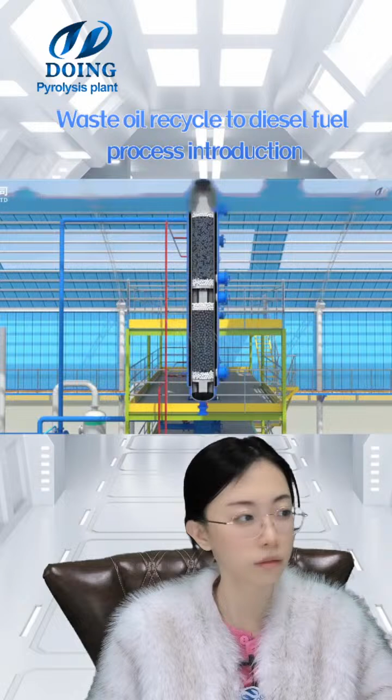All the equipment can be customized. We have different types of equipment. Later we will show you the parameters of this distillation equipment. That is to purify the waste oil, like the waste engine oil, lubricating oil, or the tire oil, plastic oil. After the pyrolysis, we can get the diesel. We always call it a distillation plant, or the pyrolysis oil distillation plant, or refinery plant.

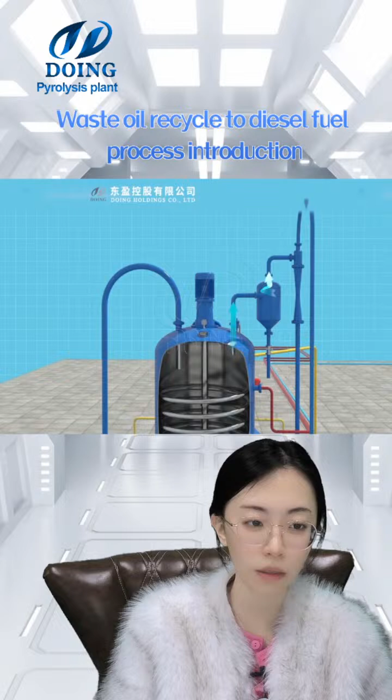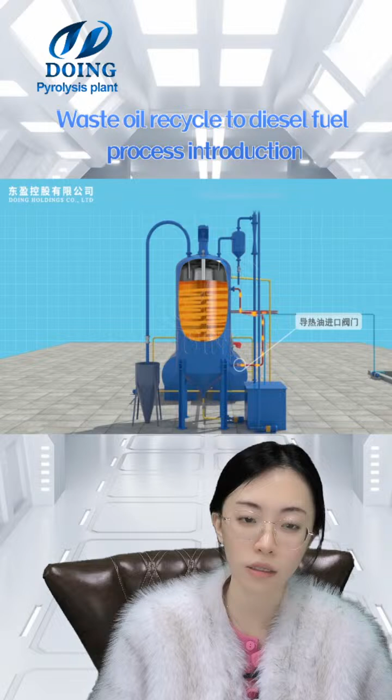This 3D video is about the distillation equipment that can process the oil, the waste engine oil, lubricating oil, or the pyrolysis oil. It includes the distillation and the cooler section. You can look at this 3D video first. We will introduce the details of the device and section later.

And now we have our own factory. So if you have the requirement to visit, you can tell our sales manager. Our factory is in Henan province in China, next to our company. The company is in Zhengzhou City, Henan province.

We have different devices, like this distillation equipment, and also the waste tire, waste plastic pyrolysis equipment, and the PCB board, solar panel, lithium battery crushing and separation device, and the biomass carbonization furnace. And today we introduce the distillation plant. There are different devices that can purify the pyrolysis oil or waste engine oil to diesel. It includes the stove and the cooler system.

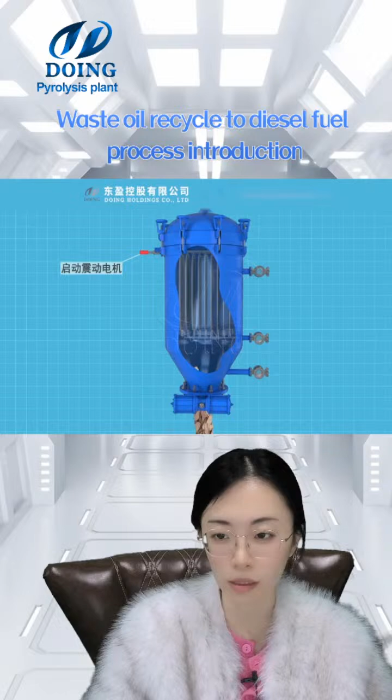We have different capacities, like 1 ton, 5 ton, 7 ton, 15 ton, to reach your requirements. And if you have different configurations, you need to contact our sales manager and engineer, and we can give you the best plan for you. All the equipment can be customized.

And this is the purification system. All the devices are environmentally friendly, there is no pollution during production. In the purification system, we have different plans because the policy is different in different regions. So there are different ways to purify the harmful gas during our production.

Okay, let's start from here. This is the new distillation plant. We also have another technique. And this is the conduction oil. It will reach the whole system for the double heating system. The high-level tank, because this is the highest point, has the highest potential energy to let the conduction oil fill the whole system. This is the furnace and the cooler.

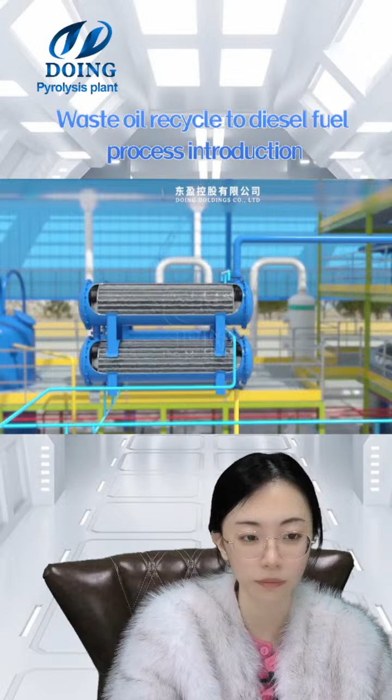Now the temperature is nearly 380. Just in order to protect the catalyst, we designed it so the previous section of the oil doesn't go to the catalytic tank. It will be controlled by this valve, and then it will go directly into the condensation system and into the first oil tank, because the catalyst is a kind of expensive consumable during our production.

This tank is equipped with a glass tube so you can observe the color of the oil. If the color of the oil is not ideal, it will go into the catalytic tower. And the uncondensable gas will return to the furnace for heating, and then the tail gas burner is used to heat the reactor.

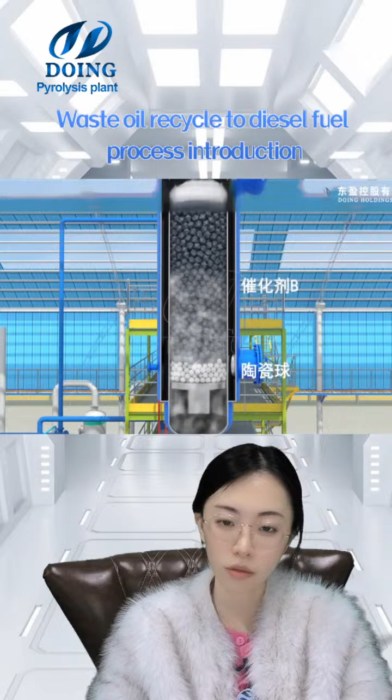And the next oil will go through the catalytic tower. These are two kinds of catalyst. This is the ceramic ball that supports the catalyst. Then it will go through the tank and into this second oil storage tank. Same as before, the gas goes into the tail gas burner. And now we have finished our distillation system.

But if you want lighter diesel oil, we can equip it with the white clay decoloring tank. First we need to vacuum the clay decoloring tank, so that the oil will subsequently be pumped inside. This is a negative pressure system to pump the oil.

And the condensed oil is inside. Here is the white clay. Put it into the oil, and it will mix. We need nearly 5% white clay. In this tank, a motor mixing pump mixes it for nearly half an hour. Then the oil will be pumped into this blade filter to filter out the white clay.

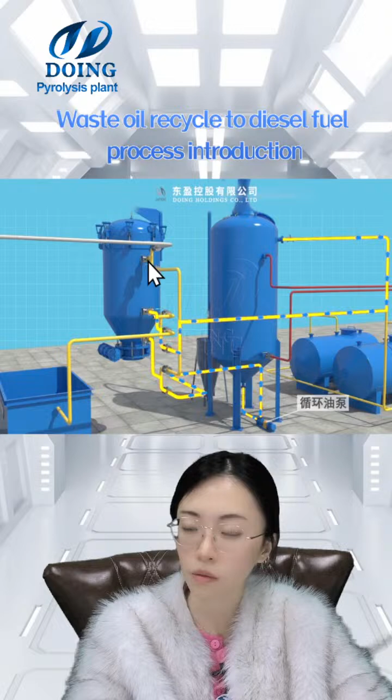The oil with the white clay will circulate continuously between the blade filter and the white clay decoloring tank. Here is the glass tube where you can see the color, whether it reaches your requirements. Then the oil will go into this, called the bag filter. We have two bag filters: one in use, and one standby.

This is the last filter used to clean the clay, which makes the quality of the refined oil better. The filter bag is inside. Then the oil after refining will go into the finished product oil tank.

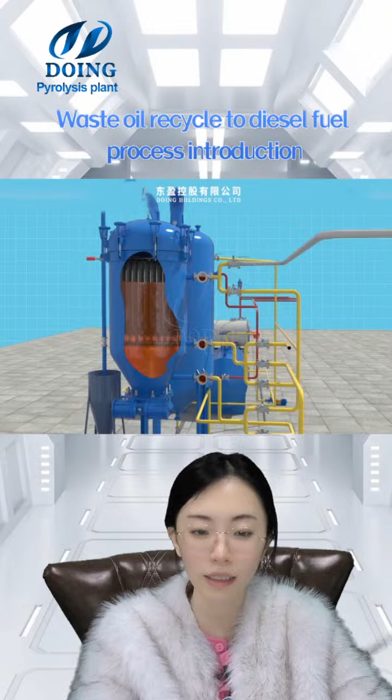This is the air compressor, which blows air back into the blade filter to dry the white clay inside the filter and make it easier to fall off. Then, you see, we use the vibration motor to shake out the white clay. That is to blow air inside and dry the white clay on the blades. Here is the vibration motor to clean the clay.

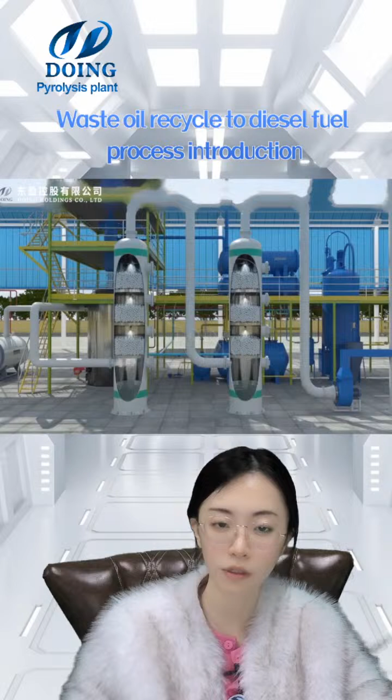And here is the flue gas treatment and purification system. We have the spray tower, and also desulfurization towers to remove the sulfur dioxide, and also the bag dust collector and cyclone dust collector to purify it. They have different techniques and devices. So our equipment is pollution-free and can reach different standards in different regions.

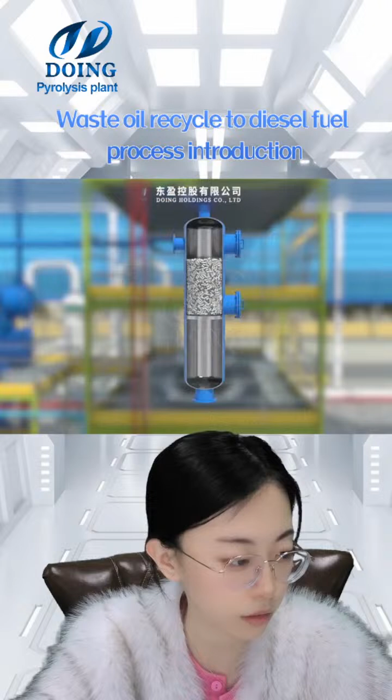And let's see the catalog of our plant. This 3D video shows our distillation equipment; if you are new here, you can look at this, and later we will introduce the detailed technique again. Then let's look at our catalog to see the parameters of the distillation equipment. Yes, this is the brief introduction.

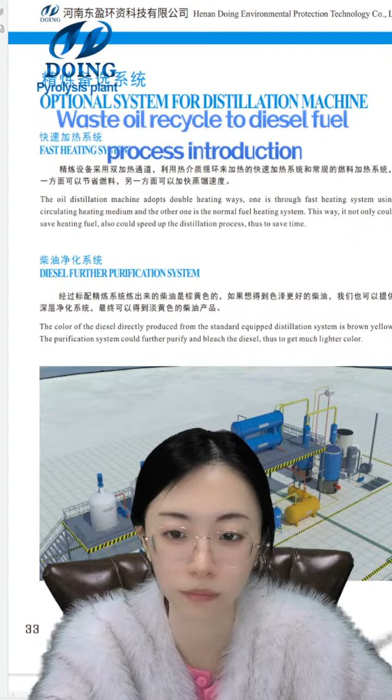Can you see the word clearly? Here it is. The oil distillation machine adopts double heating ways. One is through a fast heating system using circulated heating medium, and another way is the normal fuel heating system. The heating medium is the heating oil, which will go through the whole system of the plant. In this way, it will not only save heating fuel, but also speed up the working process.

And the final products we get: the color of the diesel directly produced from the standard equipped distillation system is brown yellow. Well, if you want to get high quality or more pure diesel, you can use this white clay decoloring system and get a lighter color.

And this is the PLC system to save workers and to improve your working efficiency. All the PLC system is built in our factory, so it is 100% the same as your customized working line.

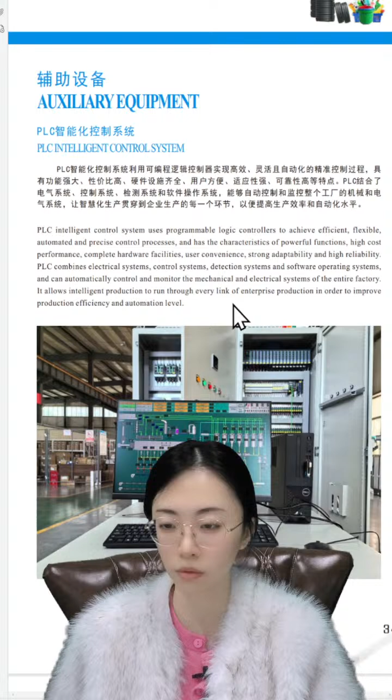The PLC intelligent control uses this high technology. We have our own engineers, so if you need to customize or to get higher working efficiency, then you can contact our sales manager and see if it's available to get this processing line.

We don't have the parameters of the distillation plant in this catalog. Here are the projects. Customers visit our factory, our company. This is the factory that has the reactor, the pyrolysis plant reactor and the distillation reactor. A customer in England. Here it is in our factory. This is one of the batch type pyrolysis plant prototypes in the factory. If you come here, the first equipment you see is this, the pyrolysis plant and the condensation system. Here is the reactor for 15 tons per day.

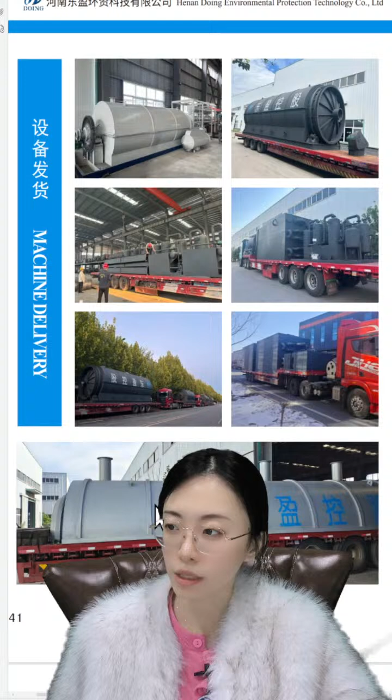Some delivery pictures. Now we have our customers in more than 120 countries. So it's very convenient for you to visit our project cases, or to see the market, know the market of your region. Here is the pyrolysis plant. And this is much bigger than that one because this is for 50 tons per day, the continuous one. We have 3 types of pyrolysis plant: the batch type, semi-continuous and fully continuous.

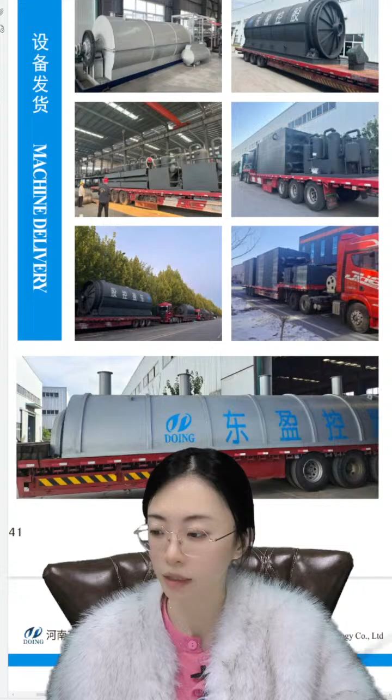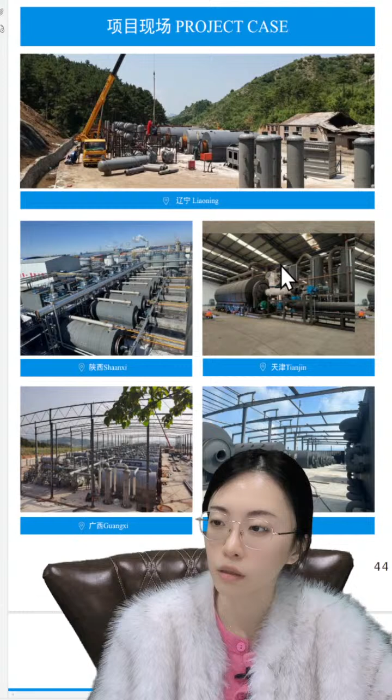And here are the project cases in China. Liaoning province, which has 8 batch type pyrolysis plants, and this is Shaanxi, to process coal tar sludge. Tianjin, a customer processing mixed hazardous waste. And this is the distillation equipment in Anhui province.

This customer is for the semi-continuous pyrolysis plant. Because we have 3 types: the batch type, fully continuous and the semi-continuous one. The semi-continuous is to process carbon black and plastic particles with high efficiency, and doesn't need to discharge the carbon black at normal temperature. This is the fully continuous pyrolysis plant in Liaoning province.

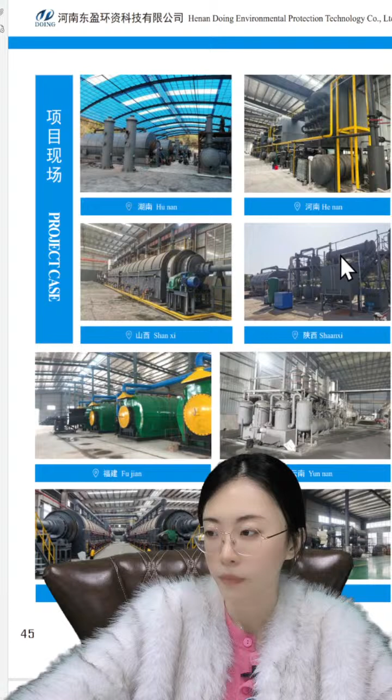And now in China, in almost each province, we have our project case. So if you want to see the project cases in China or to see our factory, it's more convenient to come, and transportation is very convenient. This is a customer abroad, America, with the fully continuous pyrolysis plant. And this is a batch type, with a unit of the condensation system. And the distillation equipment in South Africa.

We have our subsidiary companies in Africa and Nigeria because there are many customers, whether customers of the pyrolysis plant or the cassava, the oil. And here there is also a fully continuous pyrolysis plant in Kazakhstan to process waste tires, 50 tons per day. Mexico, Brazil. Another Mexico project case, which has 12 batch type pyrolysis plants. Vietnam, Brazil, Philippines.

Here are some patent certificates of this equipment. We have several patents, like the safety device, the purification device, the vacuum device, the auto removal system. It's all our patent. We have our own engineering team, and all the equipment can be customized. Here are the patent certificates.

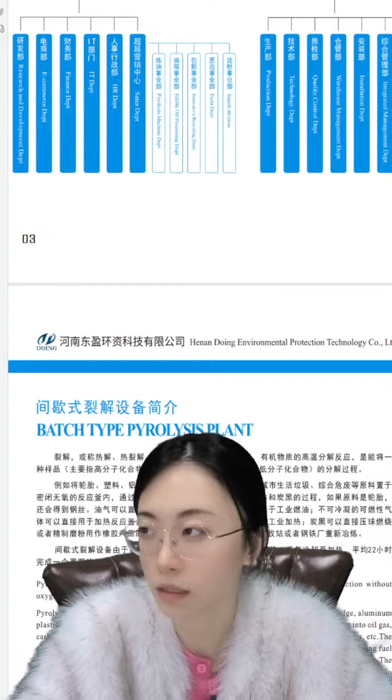Here is the batch type pyrolysis plant. We have three kinds of pyrolysis equipment: the batch type, semi-continuous, and fully continuous, which have different working efficiency. The batch type is one batch per day and can process tire, waste plastic, oil sludge, coal tar sludge, aluminium plastic, or other uncommon materials, and can get the fuel oil from them. The fuel oil can be used in brick factories for heating, cement factories, glass factories.

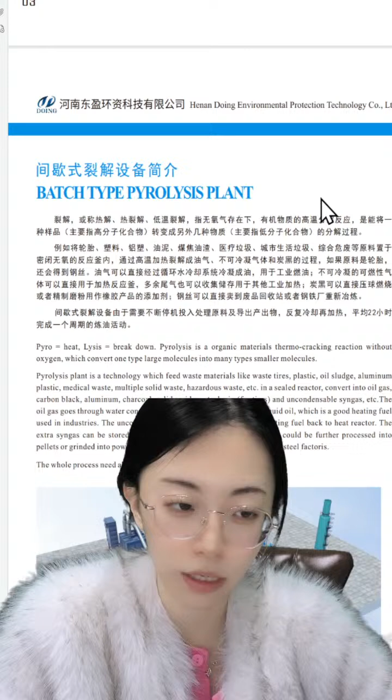This is a batch type pyrolysis plant.

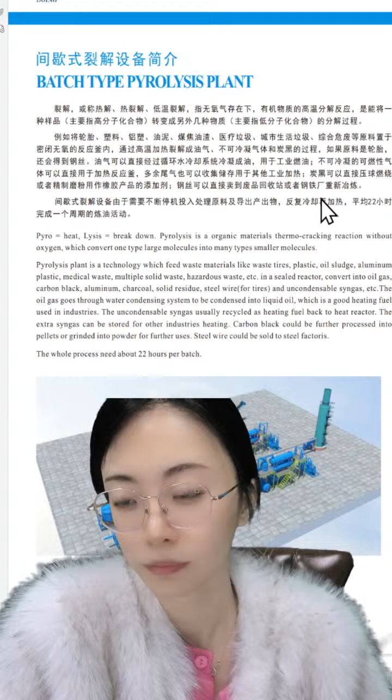Let's see the 3D video of them. This is a 3D layout: the feeding system, pyrolysis system, condensation system, the deep processing of the carbon black, and this is the auto removal system.

This is the profit analysis. For reference, we can see the consumption and the income every day, in each step. But because the price is different in different regions and the market changes, it's just for reference for each section.

We don't have water consumption, but we have the power, the labor, and the raw materials to consume. And this is the pyrolysis plant, for reference, not the same as the distillation equipment. Here the example is a 10 ton per day batch type pyrolysis plant.

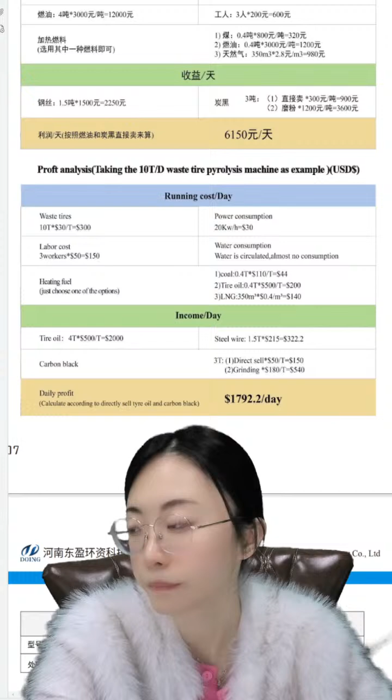In different regions the tire price is different, the power consumption is not the same, and the price of the tire oil also changes. In China, in these years, it's nearly 3,000 or 4,000 each ton, but a few years ago it was more than 5,000. So it has changed a lot, and the market has changed.

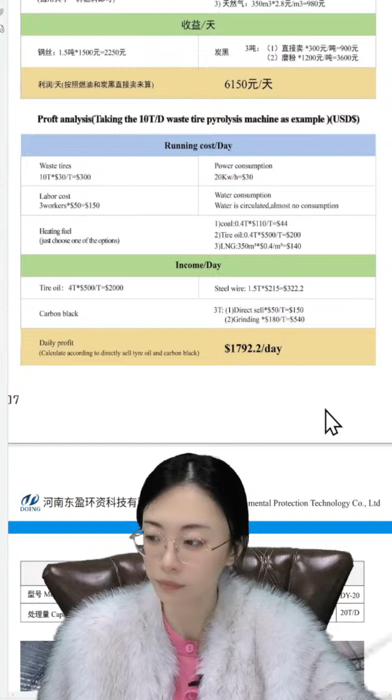This is the parameter of the batch type pyrolysis plant. The smallest one we have is 100 kilograms per day. The largest one is 20 tons per day. It's a little bit smaller than the continuous one. The continuous has the highest working capacity, 50 tons per day.

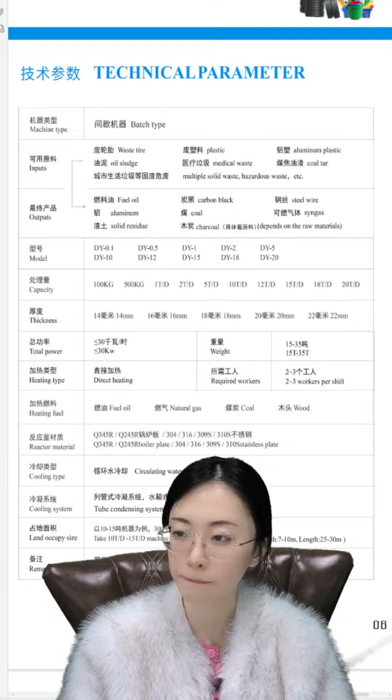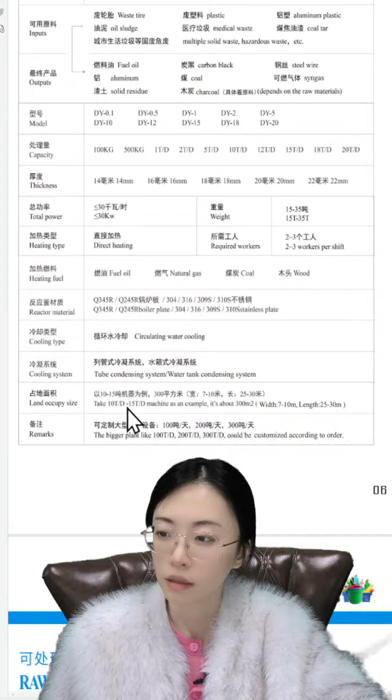Here you can see the weight, the power, the labor required, and the land occupied; the size for 10 ton is nearly 200 to 300 square meters.

You may ask, what is the raw material and what products can we get after pyrolysis? The most common materials we use are waste tire and plastic. The oil yield for waste tire is nearly 40 to 45%. We also have 35% carbon black, 15% steel wire, and the syngas.

About plastic and other solid waste: if you get pure plastic, the oil yield can reach 90% to 95%. But for garbage, daily waste, or construction waste, the oil yield is different. So we need to experiment.

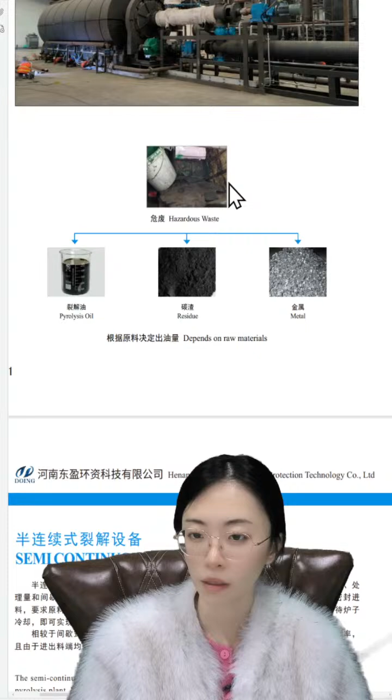Next is the semi-continuous pyrolysis plant. This is different from the batch type. It can discharge carbon black at a high temperature without needing to cool down the reactor, so it has a higher working efficiency.

It's designed by combining the processes of continuous and batch type pyrolysis plants. The equipment, dimensions, and processing capacity are basically the same as the batch type. The difference lies in the improvement of the feeding and discharging ways.

The feeding way is changed from opening the furnace door to a screw conveyor, a sealed feeding way, which requires the raw material to be pre-treated. So if your material is waste tire, we need to process it into rubber powder. If it's plastic, we need to turn it into plastic particles.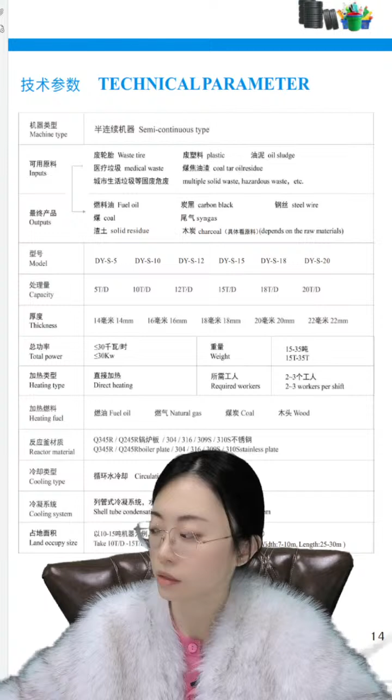Here is the parameter of the semi-continuous. Almost the same: the model is the same and the land occupied is the same, just the working efficiency differs. The batch type is one batch per day, and the semi-continuous one is 3 batches in 2 days.

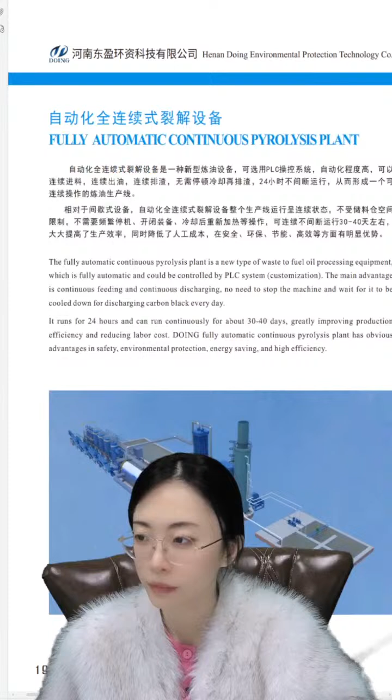The fully continuous is a new type of waste-to-fuel processing equipment, which is fully automatic and could be controlled by a PLC system. The main advantage is continuous feeding and continuous discharging. No need to stop the machine and wait for it to cool down for discharging carbon black every day. It runs for 24 hours and can run continuously for about 30 to 40 days, greatly improving production efficiency and reducing labor cost.

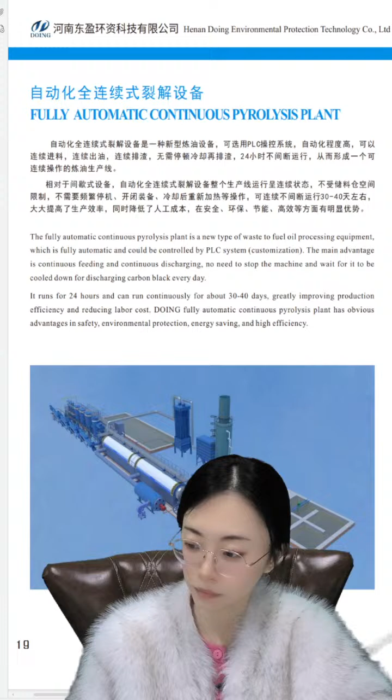This is kind of different from the semi and the batch type. First is the model or the capacity. The biggest one is 50 ton, and also we have 15 ton, 20 ton, 30 ton, 40 ton. Another difference is the heating type. The batch type and the semi-continuous use direct heating, but this is indirect heating. And the requirement of workers is 1 to 2 workers.

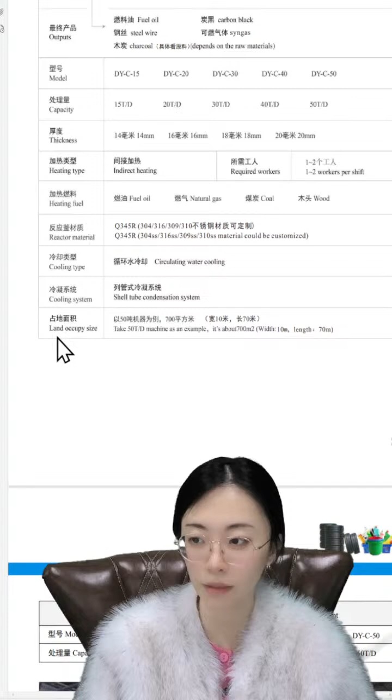This is the land occupied size. Actually, the fully continuous saves much more land, because for the same capacity, for example 50 ton, we only need 700 square meters. But for the batch type, we need almost 1080. Here are the reactor materials, same as the semi-continuous one.

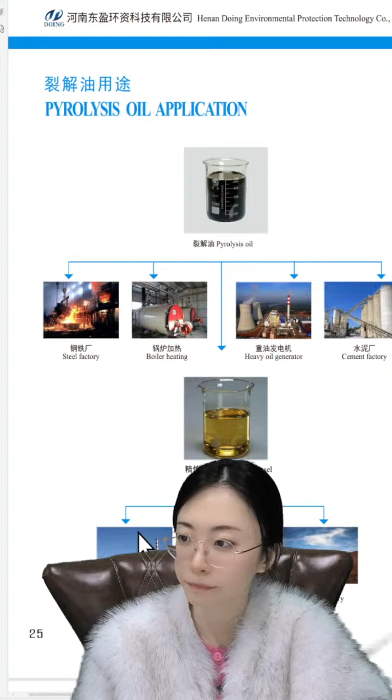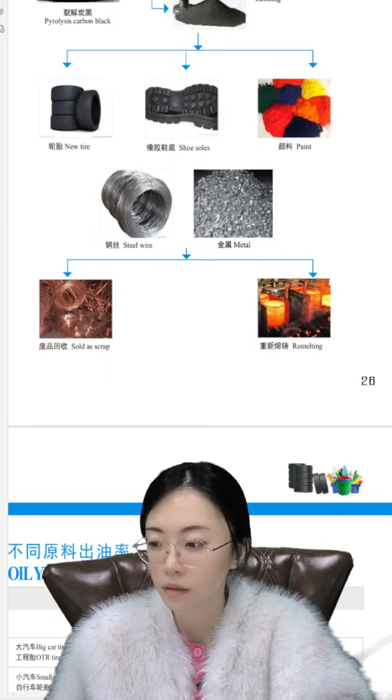An application of the oil. If you get the pyrolysis oil, you can use it as heating fuel in the steel factory, boiler heating, heavy oil generator, cement factory, or we can refine it into diesel, used in diesel generators, as diesel fuel for heating, or in heavy machinery. And the carbon black can be used for burning or refined.

And this is the different oil yield. Most of our customers are interested in this. Like tire, 45 to 55, 52, and most customers will choose big car tires or OTR tires. For general plastic, if you get pure PP, PE, PS, the oil yield is 90 to 95, and others like pure ABS is 45. Household garbage is 30 to 50, and aluminium plastic nearly 40%. And you need to pay attention that PET and PVC, these two materials, are not suitable for pyrolysis.

Okay, here is the distillation equipment. It's today's topic. The distillation machine is specially designed for refining black oil, heavy tire oil, plastic pyrolysis oil, and various industrial waste oils into light diesel. This whole refining process includes distillation, cooling, decoloring, and deodoring systems. The final diesel products could be used as alternative fuel in diesel burners, generators, heavy machinery, and agricultural machinery. Generally, the diesel yield is about 80 to 85%.

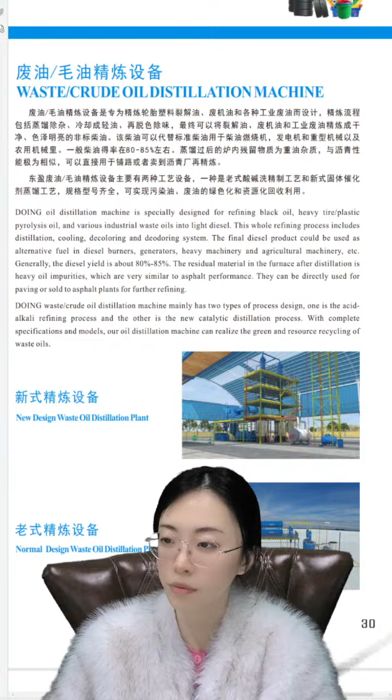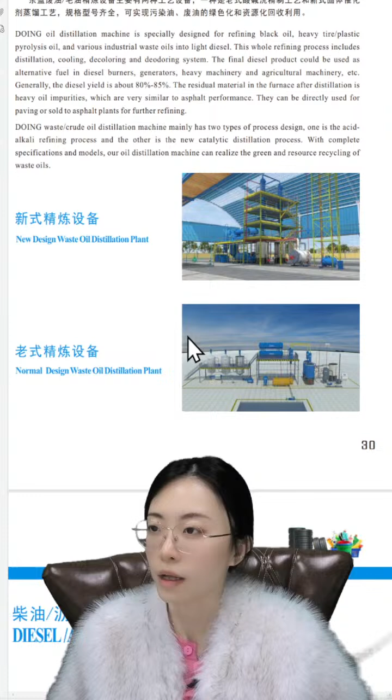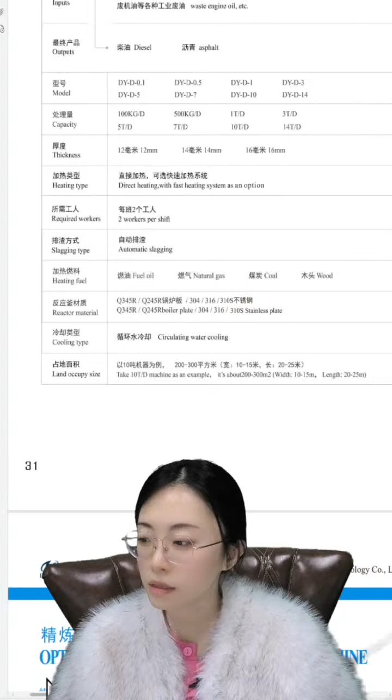Here are the parameters of the distillation plant. The models we have: 100 kilogram, 500 kilogram or 1 ton, 3 ton, 5 ton, 7 ton, 10 ton, and 14 ton. The heating way is direct heating, with a fast heating system as an option, and it requires 2 workers in the whole production line, and it occupies 200 to 300 square meters for 10 ton per day.

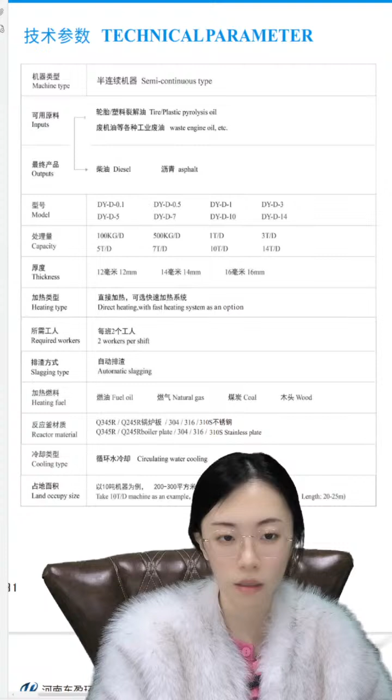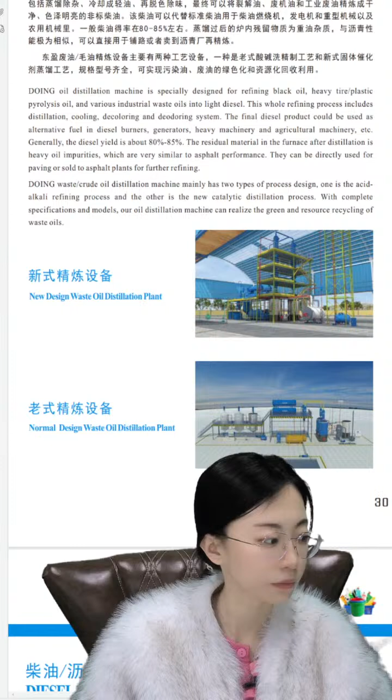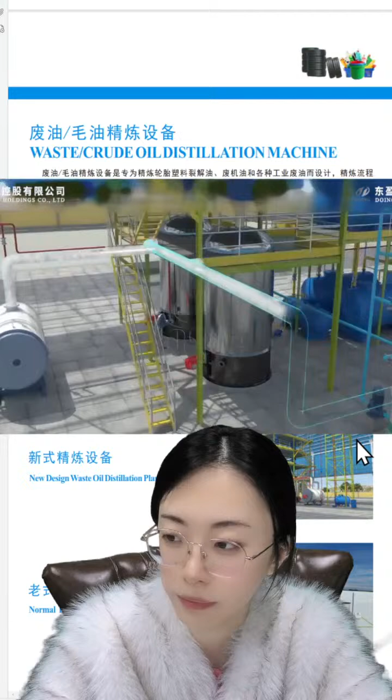Here is the 3D video. You can see this first, the distillation plant. It is to purify the waste oil into non-standard diesel, the lighter diesel, and it can be used in generators, agricultural machines, ferries or other places. The whole production line includes distillation, decoloring, and the purification system. Here is a purification system to purify the gas.

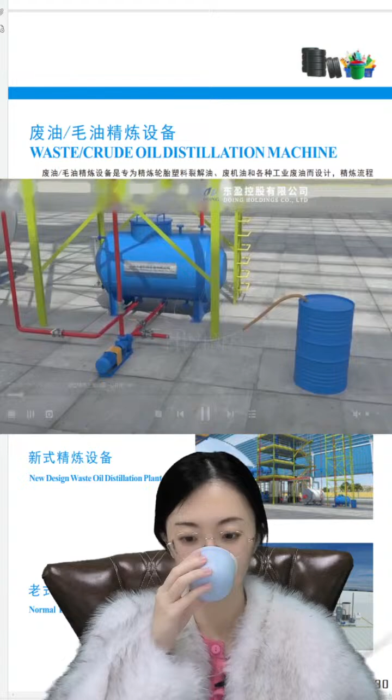First, this is the conduction oil. To pump the oil in the whole system, conduction oil.

Here is the furnace to heat the conduction oil, with the 400,000 calorie burner. And this is the circulating cooling water system of the conduction oil, and also this is the condensation system.

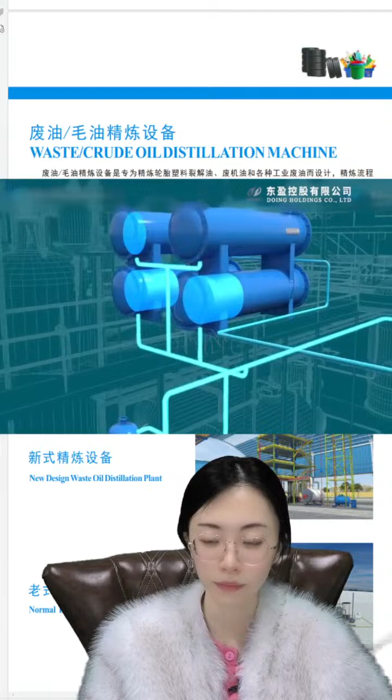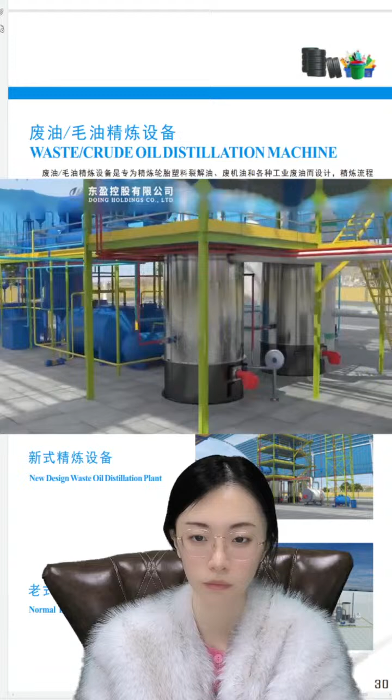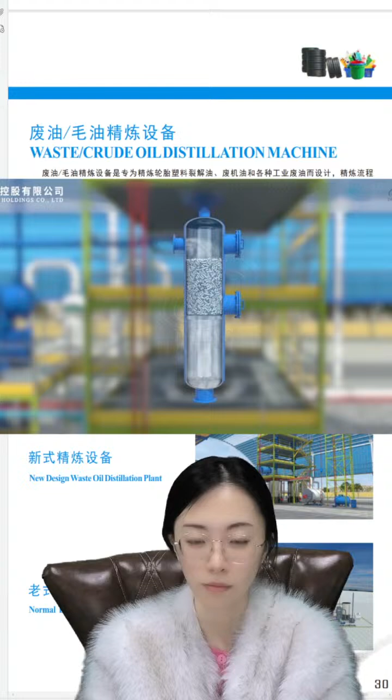This is the furnace. The conduction oil will go in the bottom and goes out from the top to fully heat exchange. First, we get this kind of water, and kind of emulsifiable concentrate. They will go through the buffer tank and go into the condensation system to liquidize them into oil.

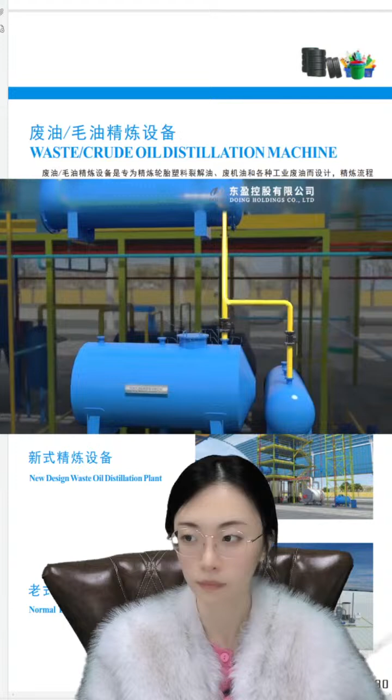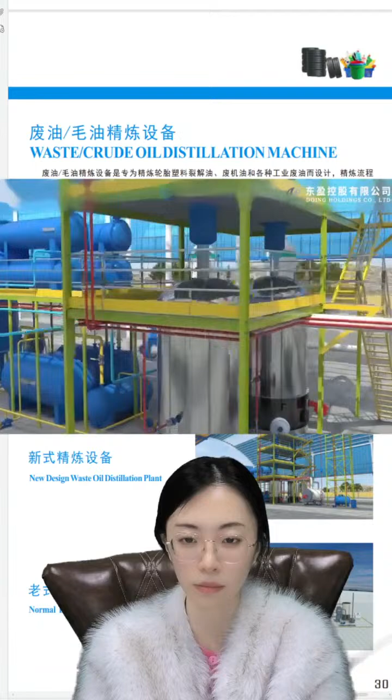This is the first tank. Then, when the temperature gradually rises, the oil gas will begin to produce, nearly 380 degrees. The same as the gas, they won't go into the catalytic tower, they will just directly go to the buffer tank and the condensation tank, and then will be collected into the first oil tank.

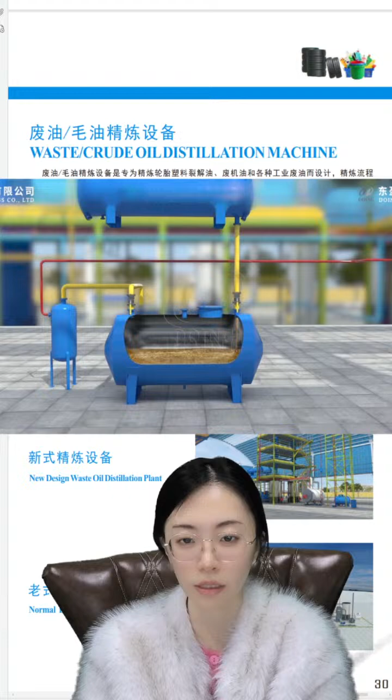The oil tank is equipped with a glass tube to observe the color of the oil. If the color is not ideal, they will go into the catalytic tower. The uncondensable gas will return to the furnace for heating to save our extra heating energy.

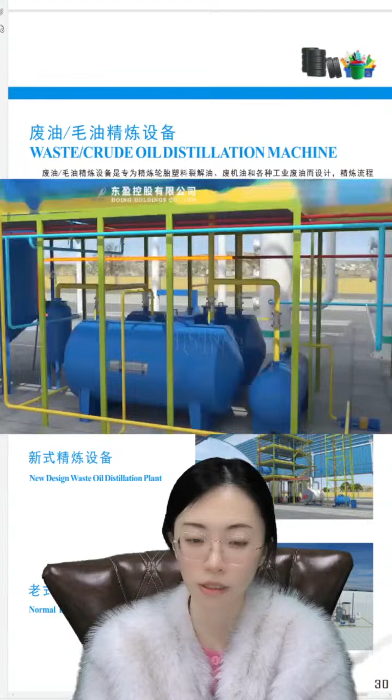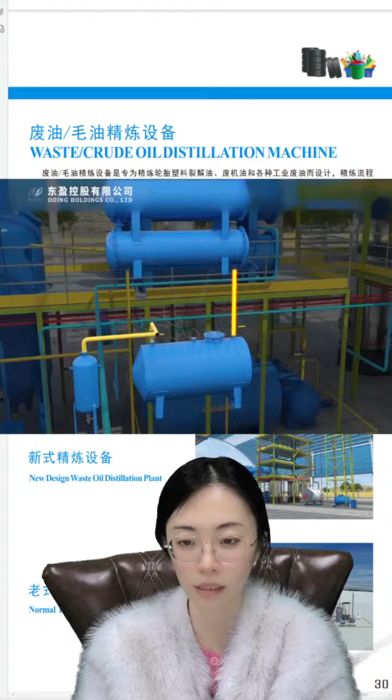The next oil gas will pass through the catalytic tower. This is catalyst A, catalyst B. Inside is the ceramic ball used to prevent the catalyst from falling off. The gas passing through the catalyst directly comes out as diesel oil, which is condensed into the second oil tank.

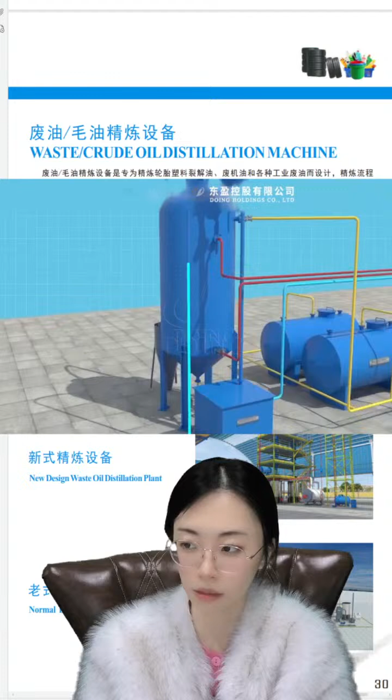If the customers want a lighter diesel oil, they can be equipped with our white clay decoloring tank. We need to vacuum the white clay decolorization tank first, so that the subsequent oil can be pumped in.

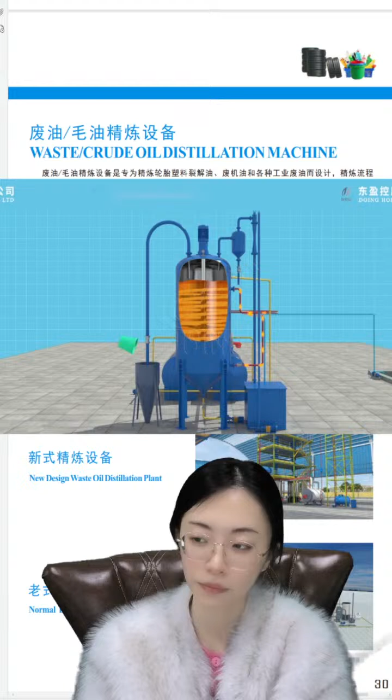This is the conduction oil inside, and we pump the oil into the tank, the white clay decoloring tank. Now we add the white clay in this tank, always needed about 5% of the white clay. And the motor mixing pump will mix for nearly half an hour.

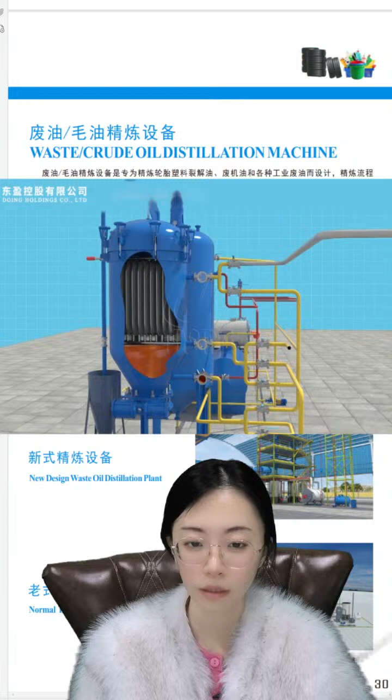Then we will pump the oil into the blade filter to filter out the white clay. The oil will just circulate continuously in the blade filter and the white clay decoloring tank. This is a circulating tube.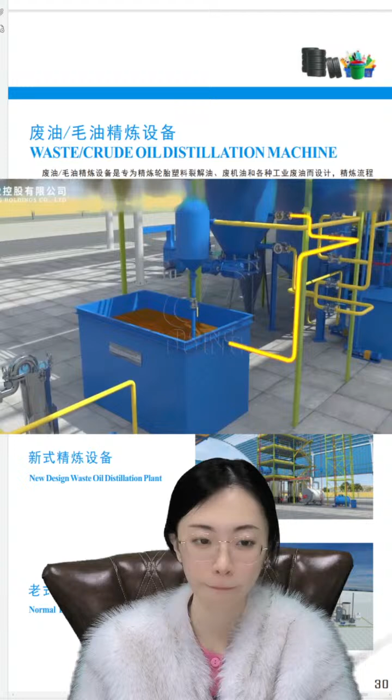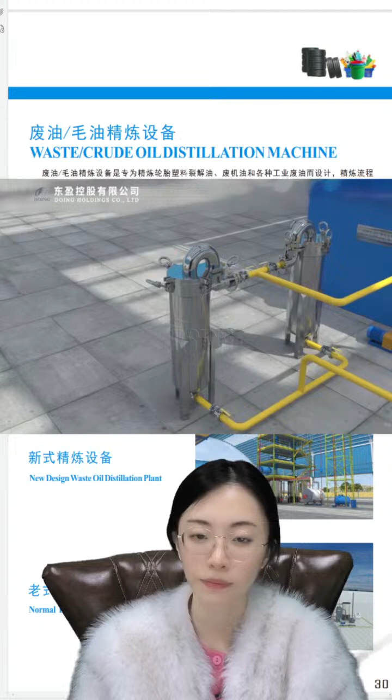This gray one is the bag filter, one for use, one for standby. This is the last filter used to clean the clay, which makes the refined oil quality better. Then the oil will pump to the big oil tank.

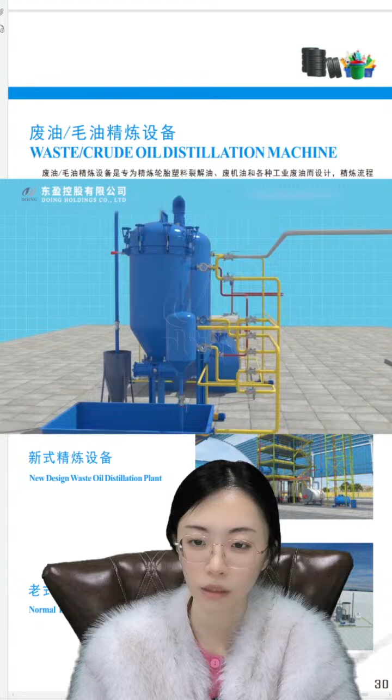This is the air compressor, which is used to blow air back to the blade filter to dry the white clay hanging inside the filter, making it easier for them to fall off. First, we need to blow the wind to purify the oil, then to dry the blade.

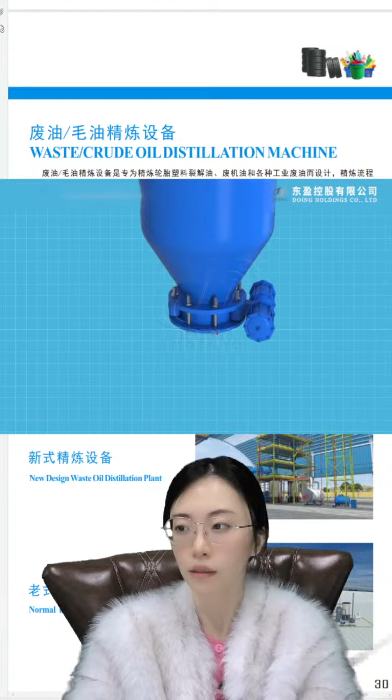Then the vibration motor is activated to filter out the clay.

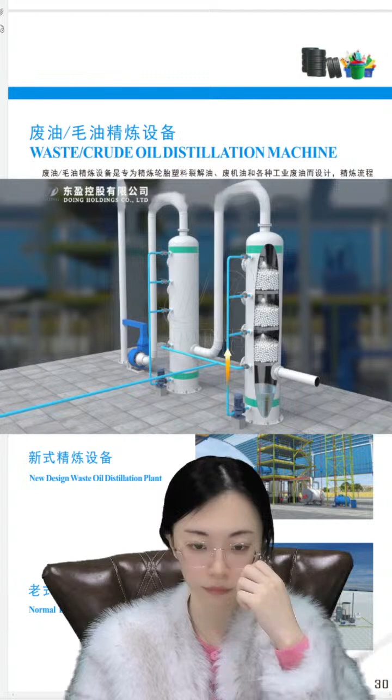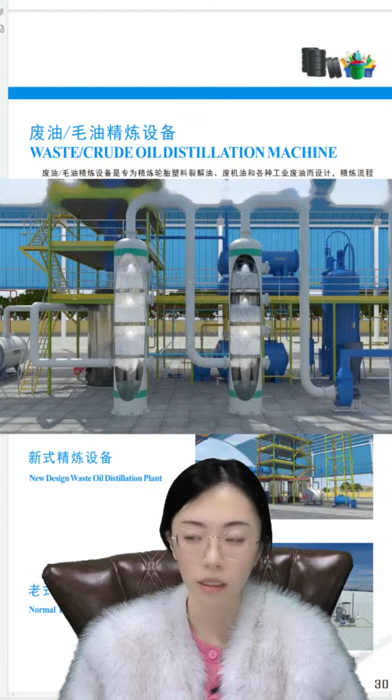This is the gas treatment system, the purification system to purify the hydrogen sulfide or the sulfur dioxide inside the gas, which are harmful for the environment and the human body. Because we have customers in different regions, there are different processing plans for the purification system.

So this is the whole production line of the new design waste oil distillation plant.

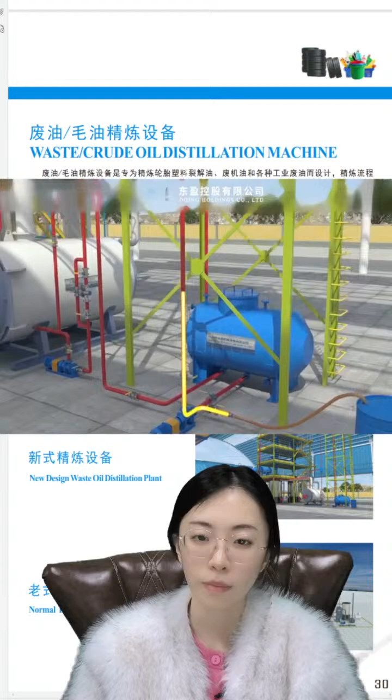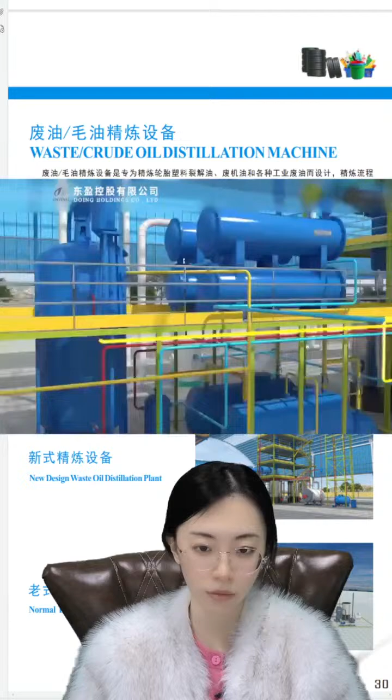We are the manufacturer of waste tire, waste plastic, oil sludge pyrolysis plants, and waste oil, engine oil, tire oil pyrolysis distillation equipment. Also, we have plants to process e-waste like PCB boards, lithium batteries, and solar panels. If your material is this kind of thing, you can also ask our sales manager how to process them in a better way.